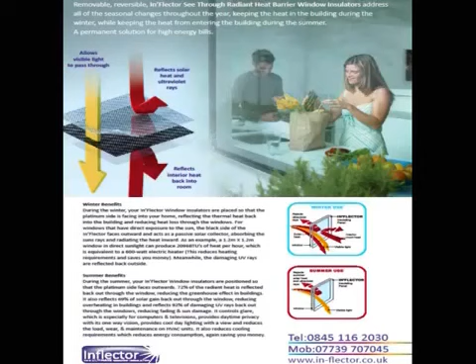As you can see from this advertisement from one of our manufacturers in Great Britain, spelling out the exact benefits of an inflector window insulator, stopping the heat from coming inside your home while keeping the cool air inside. Here is an advertisement from one of our manufacturers in Texas detailing the winter benefits of an inflector window insulator and its solar loading capacity, or magnifying that heat and bringing that free heat into your home.

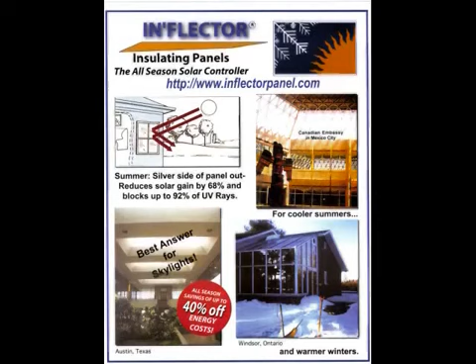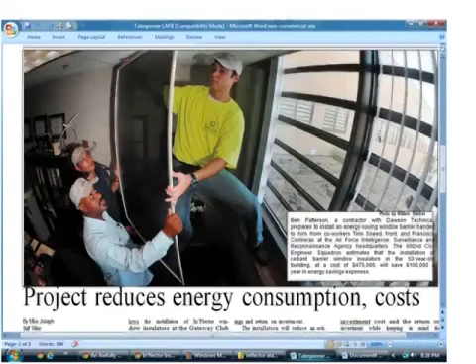I would like to offer my congratulations to Visa in England for making their building more energy efficient by installing inflector window insulators. The United States Air Force did a recent article on an inflector window insulator installation at Lackland Air Force Base located in San Antonio, Texas at Security Hill. The U.S. Air Force spent $475,000 by installing the panels, and their anticipated savings will be over $100,000 a year, with an anticipated return on investment of under 5 years.

Most energy analysts say anything that gives you a payback of 5 years or less is a must-do project, and this is what the U.S. Air Force has decided. The inflector window insulators is the product for them. The U.S. Air Force recently also completed an installation at their Officers Club. As you can see here in this picture, the U.S. Air Force has decided that inflector window insulator is the product that fulfills their requirements and needs.

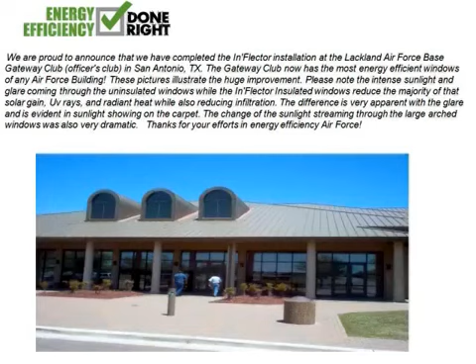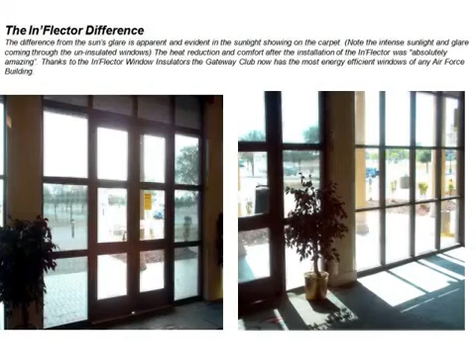Also in this illustration, you will see pictures of windows to the right there. You will see the glare coming in at the Officers Club, while on the left, inflector window insulator panels have been installed. The point here is that it's stopping that solar and radiant heat from coming in while providing a comfortable atmosphere for its customers. A few other installations of inflector window insulators is at the St. George Boat Club located in Australia, where they have a $1 million view.

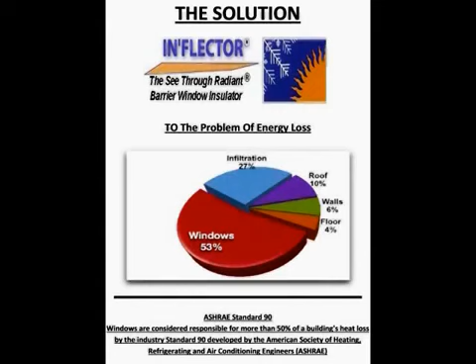ASHRAE Standard 90 stipulates that we lose up to 53% of the energy through our windows. It is the weakest link in the building envelope where we lose most of our energy or money. Simply put, the EPA states at a national level the energy costs lost through windows totals about $25 billion a year, and the energy wasted roughly equals the energy of the oil delivered annually through the Alaskan pipeline. That is outrageous.

As you can see from the Inflector window insulator's performance specifications, according to Ortech Laboratories, Inflector reduces solar heat gain on a window by 49%. Scanada Consultants found out that Inflector window insulators reduce air leakage by up to 64.8 to 71%. Yellot Solar Laboratories found out that Inflector can produce as much as 2,096 BTUs per 16 square foot insulator.

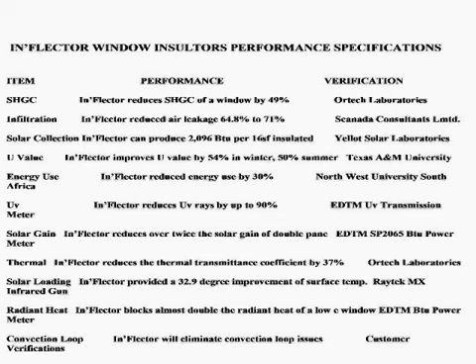Texas A&M University found out Inflector improves U value by 54% in winter and 50% in summer. North West University South Africa found out that Inflector reduces energy use by 30% and reduces UV rays by as much as 90%. These are the findings of various laboratories for Inflector window insulators.

In summertime, Inflector radiant barrier window insulators are positioned so that the reflective surface faces out, and this rejects 72% of radiant heat, reducing the greenhouse effects in buildings. It reflects 65% of solar gain back out through the windows, reducing overheating in buildings, stops 92% of damaging UV rays,

reducing fading and sun damage, controls glare, especially for computers and televisions, provides daytime privacy, one-way vision, provides cool daylighting with a view, and reduces the load, wear and maintenance of HVAC systems. Inflector reduces cooling demand, which reduces energy consumption, saving you money.

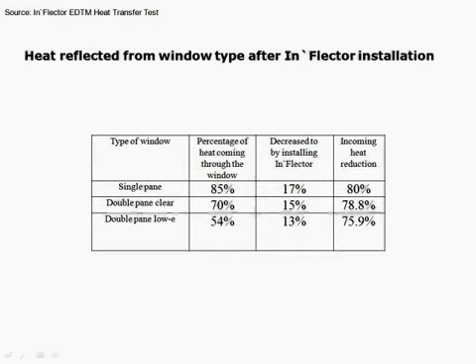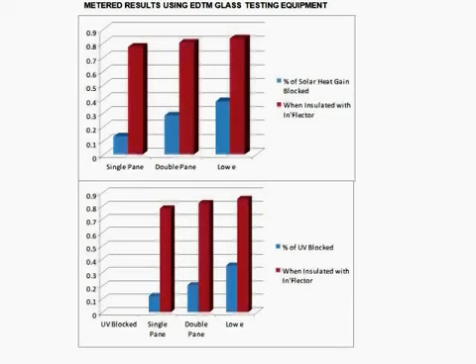On your far right, a low E window on the solar heat gain block as opposed to installing the Inflector window insulator. You'll also notice the UV rays blocked with the Inflector window insulator on the bottom graph representing the red, and a single, double, or low E window in the blue, showing how much more energy efficient the Inflector window insulator actually is.

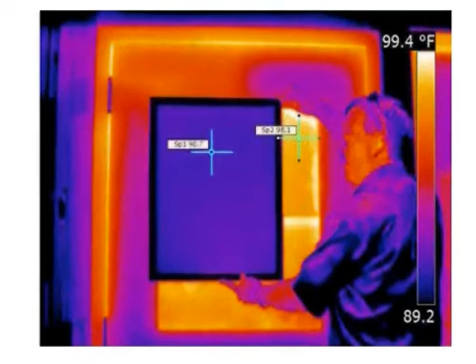In this illustration you see a man holding an Inflector window insulating panel over a hot window. Using a thermal imaging camera, you will note how much heat the Inflector panel is blocking as opposed to at the top of the man's right hand, down between his arms, that solar and radiant heat coming in. In fact, by installing this product, you make the building much more energy efficient and comfortable for everybody.

In winter, the Inflector window insulators are reversed so that the silver side aluminum is facing inward. In this mode, the insulators reflect the thermal heat back into the building, reducing heat loss through the windows. In direct sunlight, with the black side of the Inflector facing outward, the Inflector is a passive solar collector or loader, absorbing the sun's rays and radiating the heat inward.

A 4x4 window in direct sunlight can produce as much as 2,096 BTUs of heat per hour, which is equivalent to a 600-watt electrical heater. The damaging UV rays are reflected back outside, and the Inflector air barrier reduces heated air loss exfiltration. This reduces the load and wear on maintenance of HVAC systems, reducing heat consumption, reducing your electric bill, putting dollars back into your pocket.

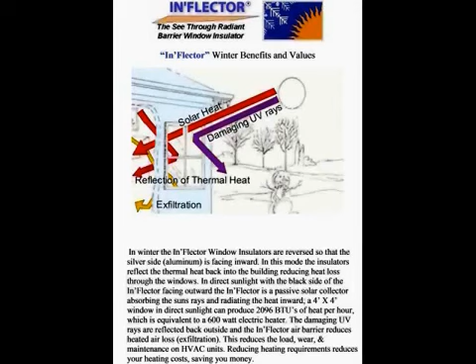Here is a real illustration of the solar loading capacity of an Inflector window insulator. As you'll note, the Inflector on the left is actually 108 degrees using a FLIR thermal imaging camera. Spot number 2 represents a bare window being 74.7 degrees and the wall itself being 77.4. What Inflector window insulator does is simply it magnifies the heat, brings it into your home, thus saving you money because your electric bill will be decreased because your HVAC system doesn't have to work as hard to heat your home.

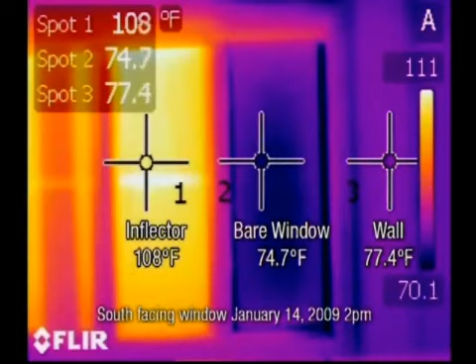If cold is the issue, not only does the Inflector reflect the heat back into the building, thereby reducing heat loss, but it has a solar loading absorption and one-way heat transfer. Let's look at this little graph here. Sunlight absorption rates. Heat absorption of plain glass is 6%. Heat absorption of the black side Inflector increases it to 51%, or an increase in overall heat absorption of 750%, according to Yellott Solar Energy Laboratory.

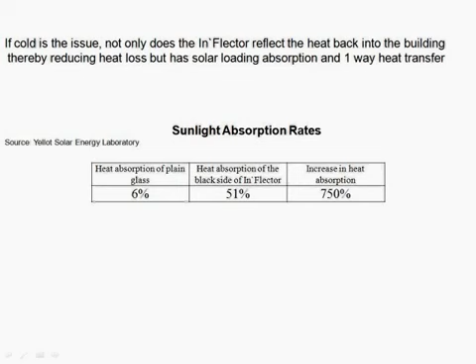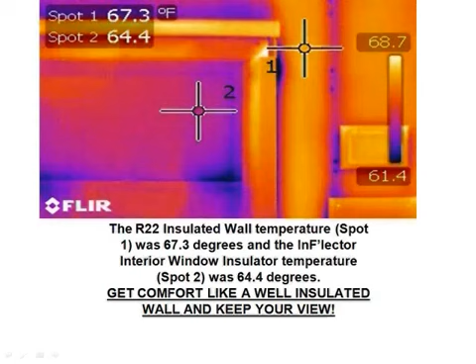Using a FLIR thermal imaging camera on a cold day in Maine, the outside window glass temperature was 16.3 degrees. That is very cold. However, on the inside of the home, the R22 insulated wall temperature, spot 1, was 67.3 degrees. And the Inflector interior window insulator temperature, spot 2, was 64.4 degrees, comparable to an R22 insulated wall. Get comfort like a well-insulated wall and keep your view at the same time.

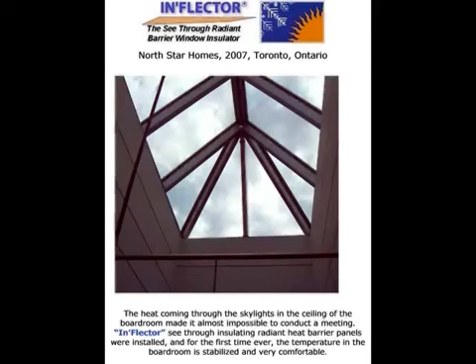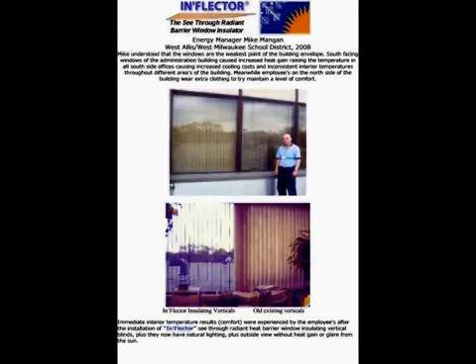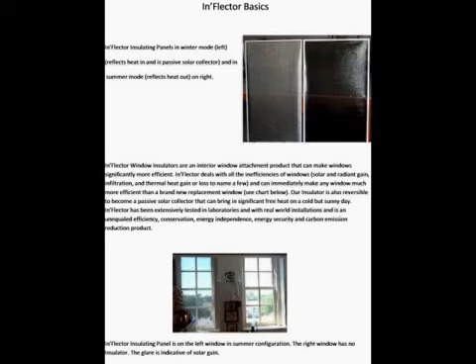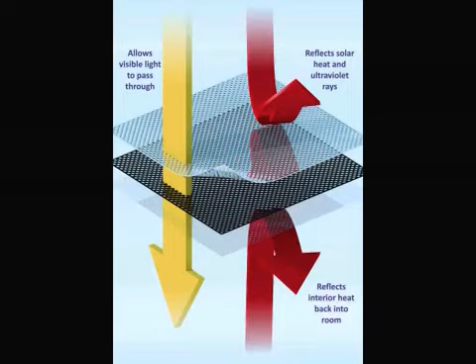In'Flector window insulators are an investment in the future for our global economy. The cost of energy is only getting higher. Therefore, our customers are experiencing a quicker return on their investment while being more energy efficient and greener for this planet. As you can see, this is the practical application of how In'Flector works through one of our advertisements from our manufacturer in the United Kingdom. And you will note as well the next advertisement details exactly the purpose, and the goal is to make this world a more energy efficient place.